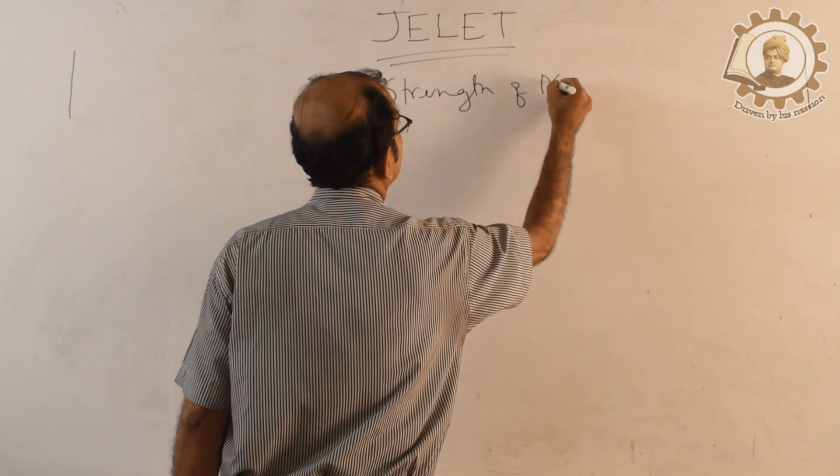That is one very interesting part of the strength of material, that is the stress strain diagram. Okay, now let us discuss. Now, before going to discuss this stress strain diagram, first of all we have to know very clearly what is stress and what is strain. So, now let us discuss the term stress. In our Bengali term, that is also called the piron, and the strain is called vikriti.

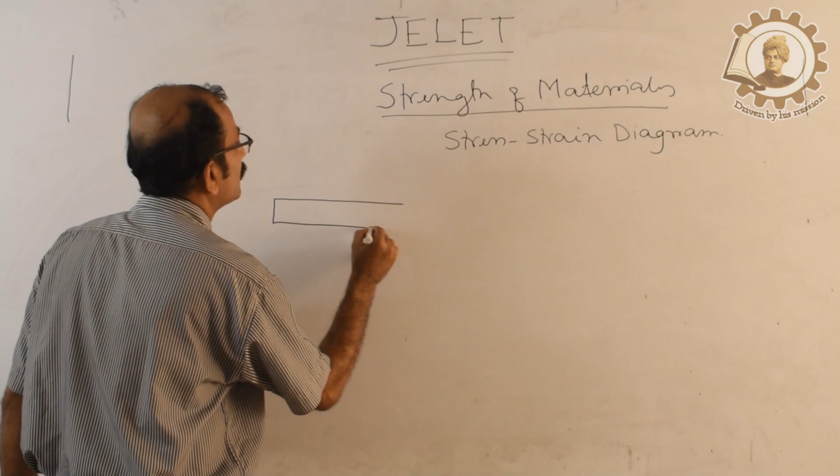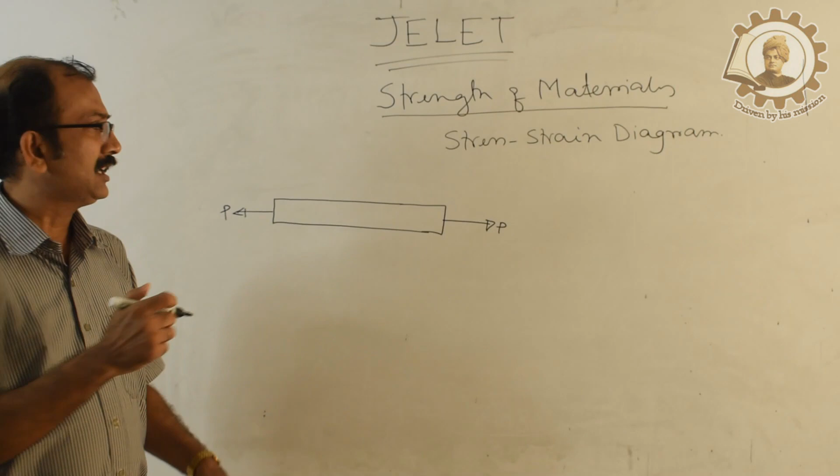Now, let us take a very small piece of iron rod or iron wire, and if we just apply a direct load, that is P, what happens? This member or this bar will try to elongate. Now, due to the elongation, one resistive force will develop inside the member that will try to resist this external force. That resistive force is called R.

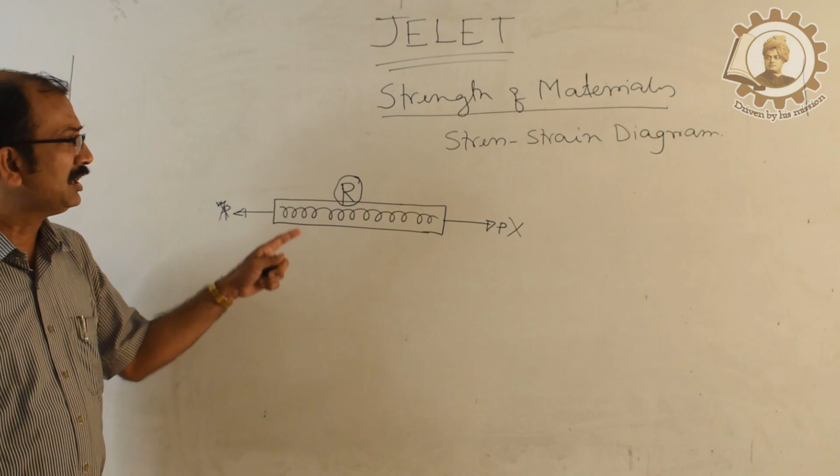Now, if we just remove this applied external load, it will spring back from this deformed state to its initial state with the help of this resistive force. Now, this resistive force per unit cross-sectional area is called the stress. So, stress is nothing but the internal phenomenon of the material.

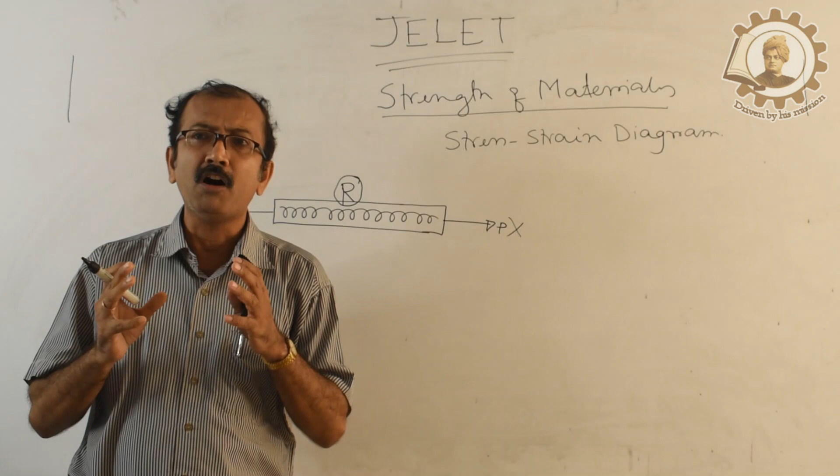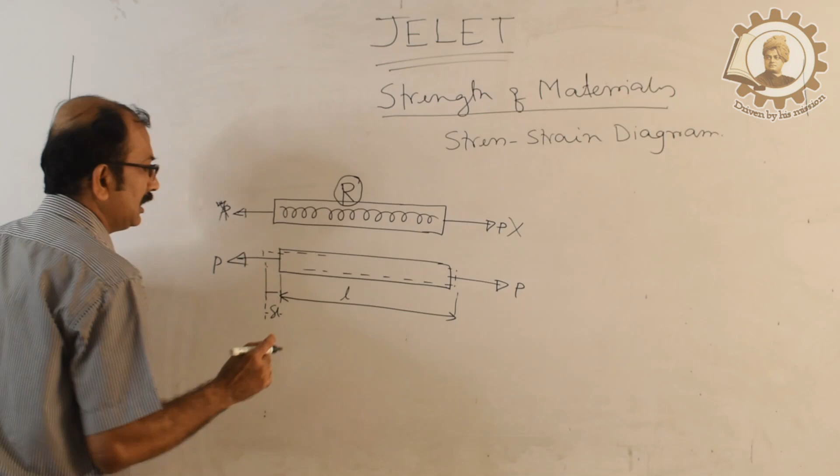Okay. Now, if we just apply the direct load, it will try to elongate the member. The diameter of the member will be reduced, and the length of the member will be elongated. Suppose the total length of the member before the applied load is L, and del L is the length increased, and the diameter before the applied load is small d, and obviously the diameter will be reduced.

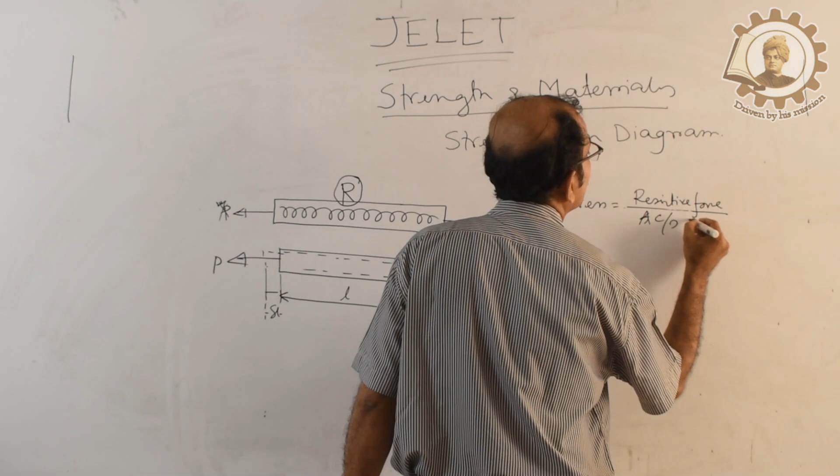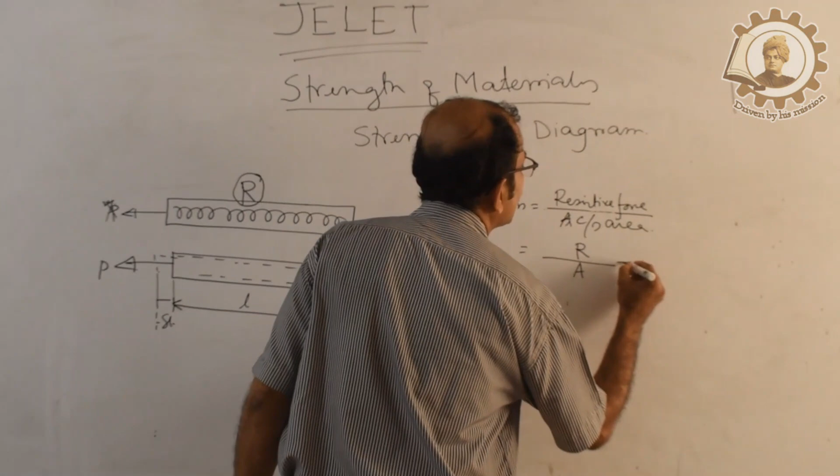Now we can write the stress is nothing but the resistive force divided by cross-sectional area. That resistive force is exactly equal to the applied load, so resistive force by A is nothing but P by A. Okay. Now that is called the stress. This stress is denoted by the symbol sigma. Sigma here is called the direct stress.

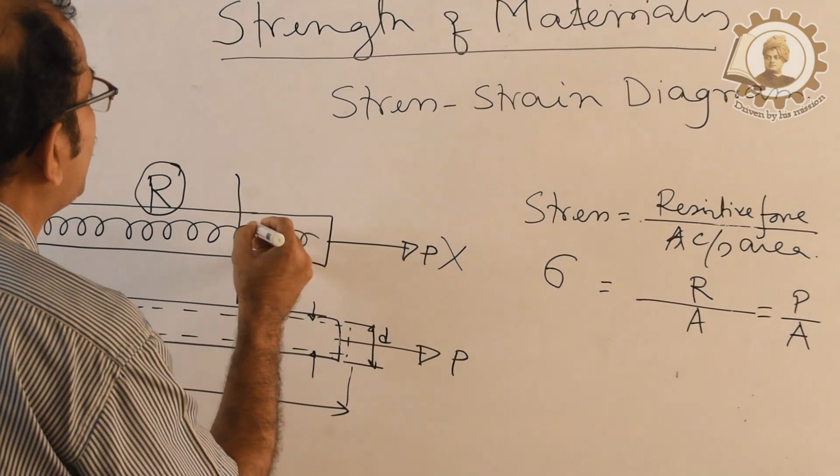So what is direct stress? It is directly applied on the member, that means the resistive force divided by cross-sectional area. Stress can be divided into many categories. The main broad classification is, one is the direct stress, another one is the shear stress.

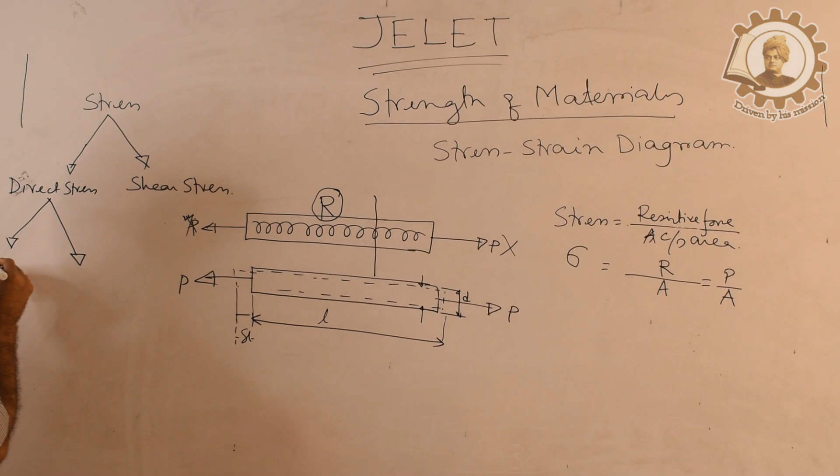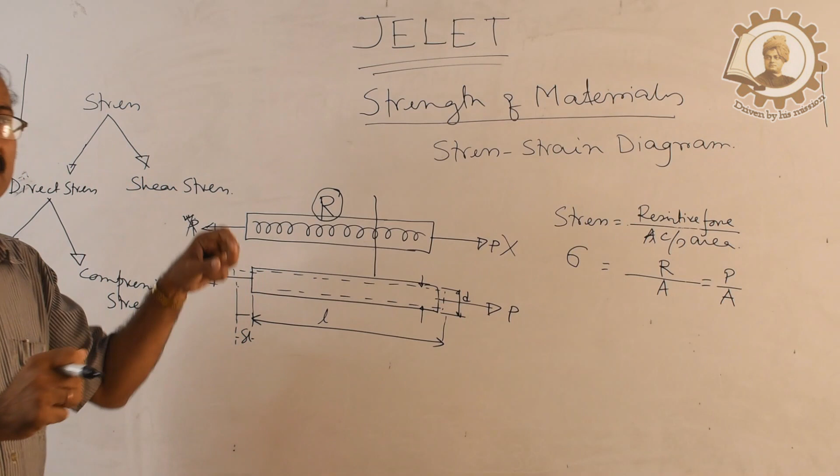Now this direct stress can also be divided into two categories. One is the tensile stress, another one is the compressive stress. So what is tensile stress? When the member tries to elongate, the stress developed inside the member is called the tensile stress. Now the same phenomenon, if we just compress the member, a resistive force will be developed inside the member that will try to resist that external load.

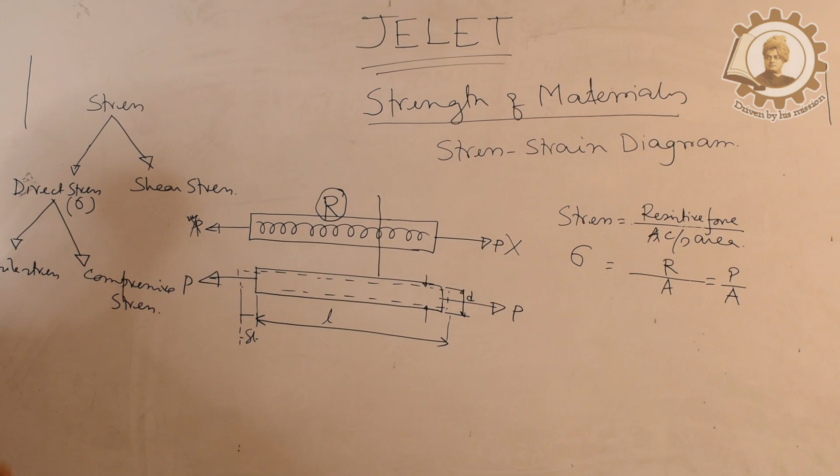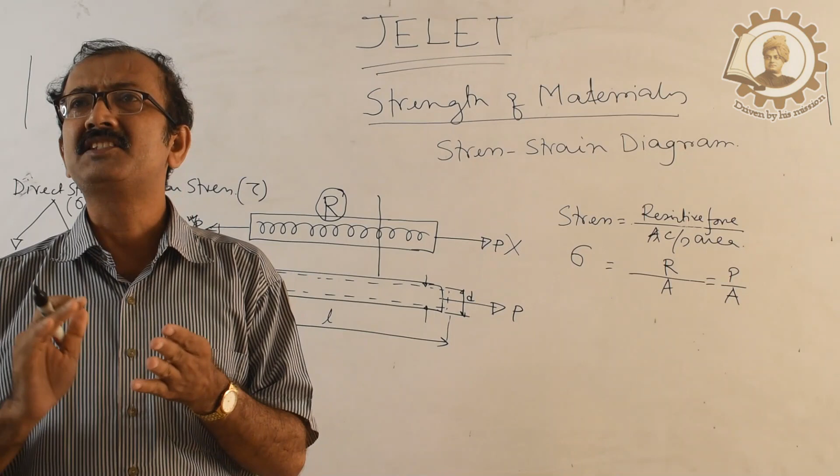So that compressive stress is nothing but that resistive force divided by cross-sectional area. These two stresses are denoted by the symbol sigma. Now shear stress, its symbol is tau. When a system tends to slide from one part to another part, the stress developed in the shearing area is called the shear stress.

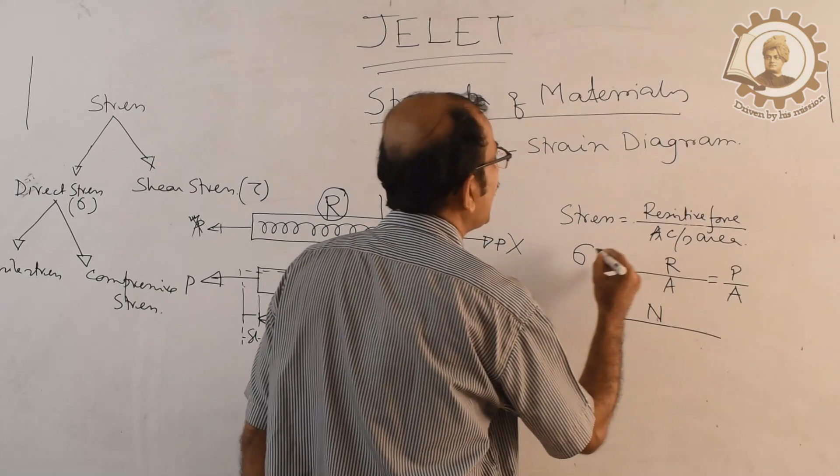Now if you just see, the resistive force, that means the load, its unit is the Newton. So Newton, and the cross-sectional area, that is the millimeter square.

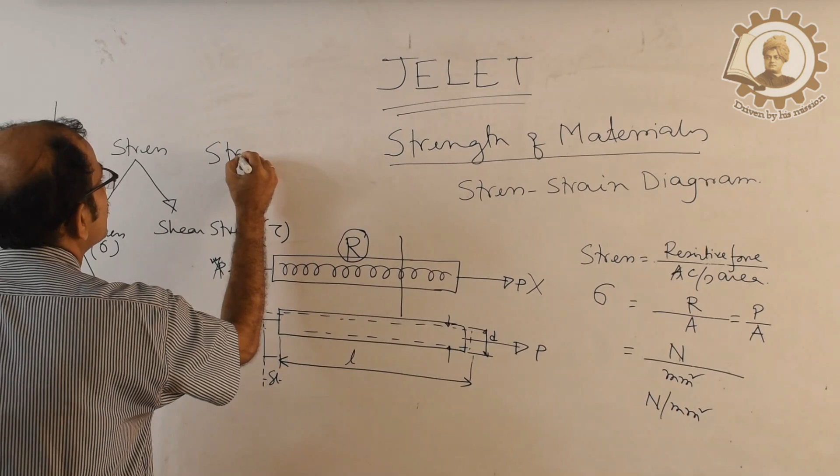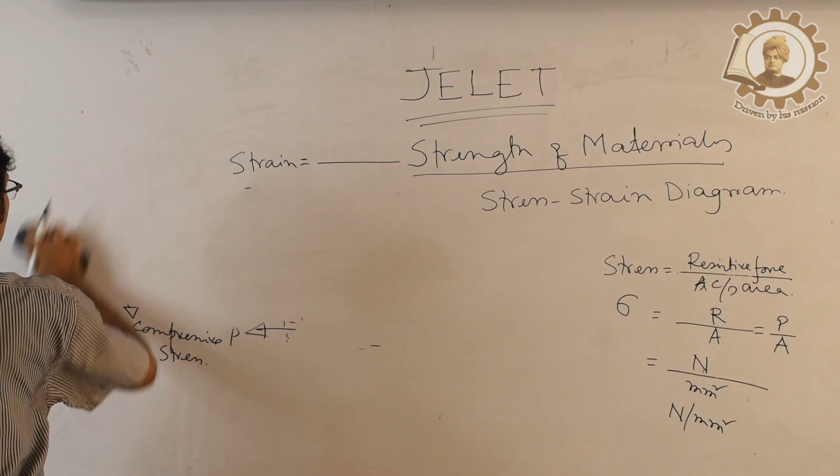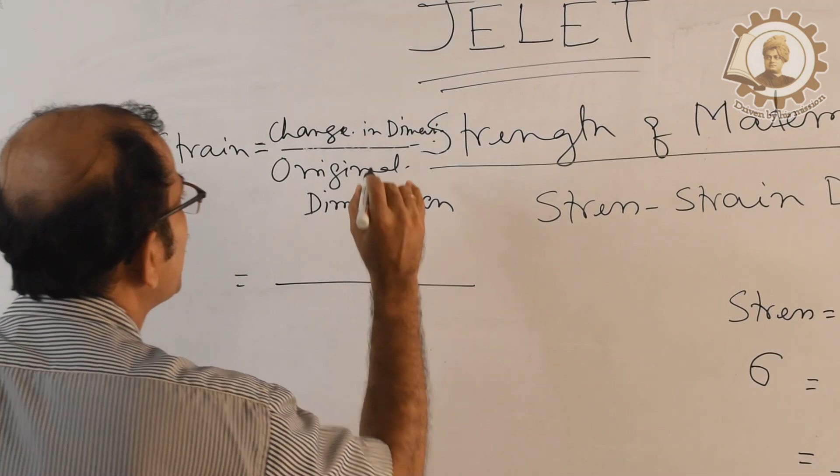So the unit of stress is Newton per millimeter square or kilonewton per millimeter square, whatever it may be. Now in the case of strain, strain is unitless. Why is strain unitless? If we just write strain, strain equals change in dimension divided by original dimension. I mentioned change in dimension because if we elongate the member, the length will be increased as well as the diameter will be reduced. If you compress the member, the diameter will be increased and length will be reduced. So change in dimension by original dimension.

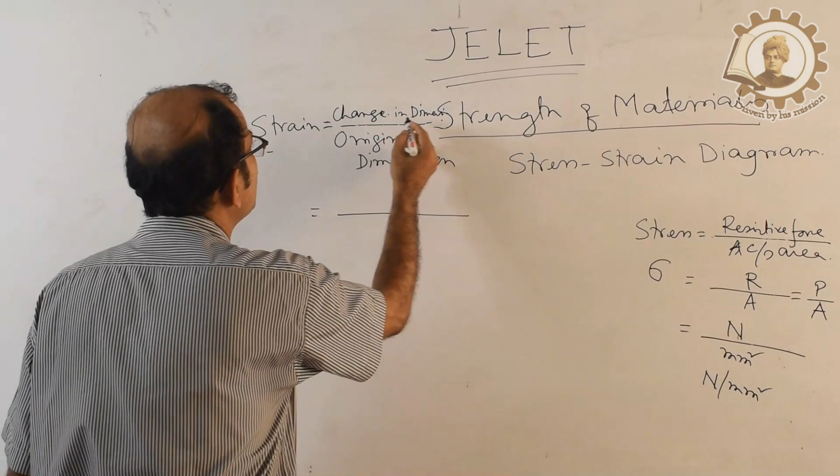If we consider the length, then it is del L by L, that is the change in length by original length. Strain is denoted by the symbol epsilon. So epsilon can also be written as del D by D, that is the change in diameter by original diameter. This is the ratio of two lengths. That's why it is unitless. So strain is unitless and stress is Newton per millimeter square.

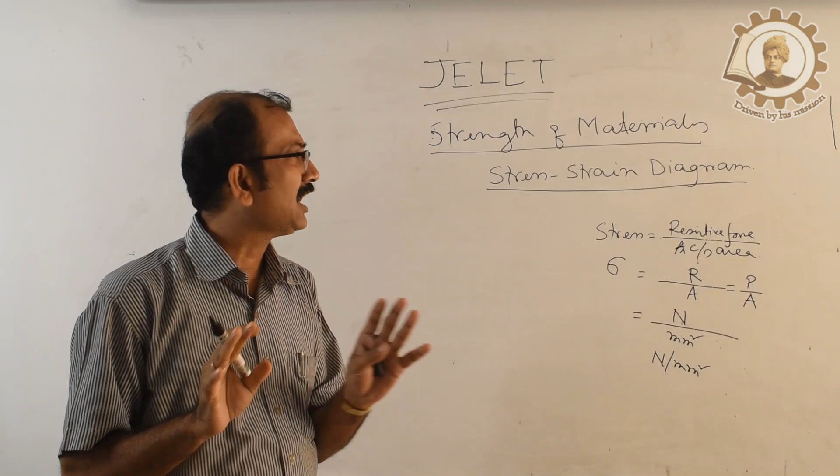Now we discuss the stress strain diagram. The stress strain diagram of mild steel, that is the ductile material. There are so many types of material: ductile material, brittle material, malleable material. The broad classification is that material can be divided into two categories. One is ductile in nature, another one is brittle in nature.

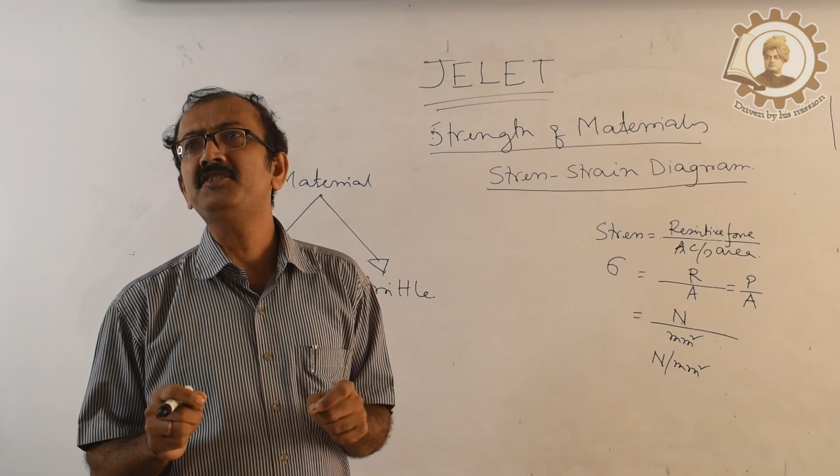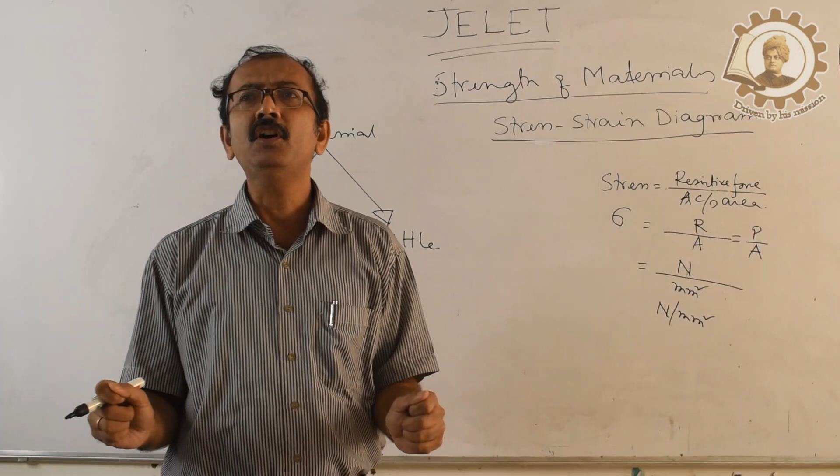So what is ductile material? It is the property of the material by virtue of which the material can be drawn into wire. Examples of ductile material are mild steel, MS, copper, and aluminium. These have the ductile property, that means the material can be drawn into wire. This type of material also has another property, that is the malleable property.

So what is malleable property? It can be flattened into sheets. Mild steel can be flattened into sheets. Copper also has the malleable property, that means it can be flattened into sheets. Aluminium also. So these are the ductile materials. A very common example is MS, mild steel. The steel that is generally used in our construction is called mild steel.

Now the question comes, why is it called mild? Mild means a little bit. A small amount of some element is present, that's why it is called mild. Which element is present in small amount? That is carbon. The percentage of carbon in the steel is less, within a range, so the steel is soft in nature and can be drawn into wires.

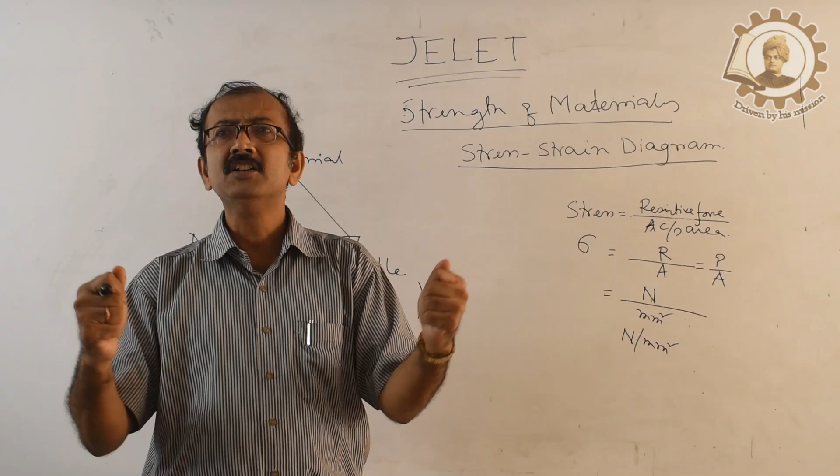Brick, stone, chalk, glass are brittle materials because they are very weak in tension. If you apply a load to brick, chalk, glass, or stone in the tensile direction, it will not take much tensile load; with a small amount it will break easily. But if you apply compressive force to brick or chalk, it will take a large amount of compressive load, but the elongation of the brittle material is very less.

So that is ductile material and brittle material. Now we go to the stress strain diagram of the ductile material mild steel first, and after that the brittle material. Now let us discuss.

So this axis represents the stress and this axis represents the strain. Symbol sigma, that is the direct stress, and this is the epsilon, strain. Now if you see this diagram, this is the stress-strain diagram, so just at the bottom we write stress-strain diagram of mild steel, MS. So this is a ductile material. Okay.

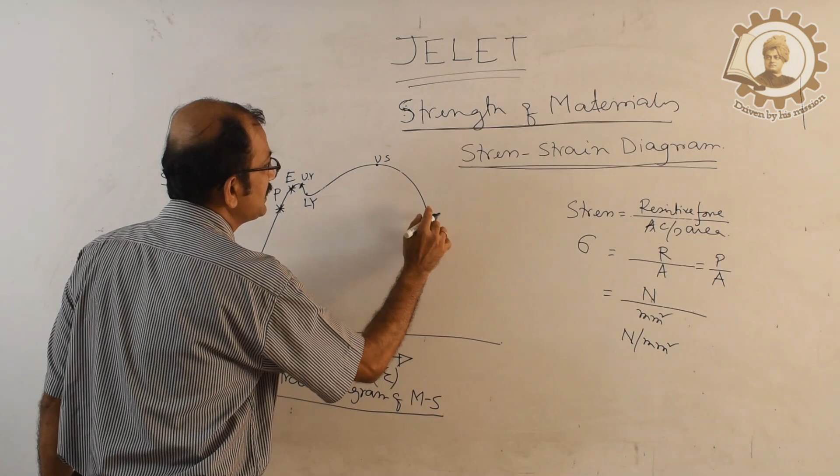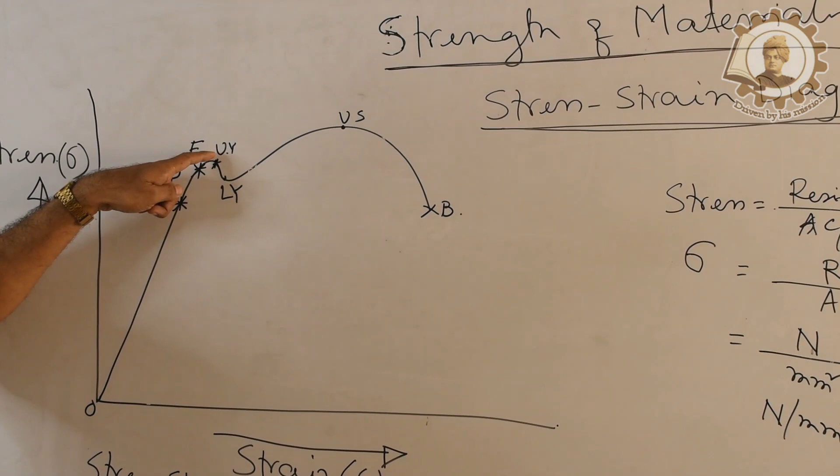Now you see that this line is passing through the origin, and there are a few points. One is the proportional limit P, this is the elastic point, this is the upper yield point, this is the lower yield point, this is the ultimate stress, and this point is the breaking stress or breaking point. Now I am repeating it again. Proportional limit, elastic limit E, upper yield point Uy, lower yield point Ly, ultimate stress, and this is the breaking stress or breaking point.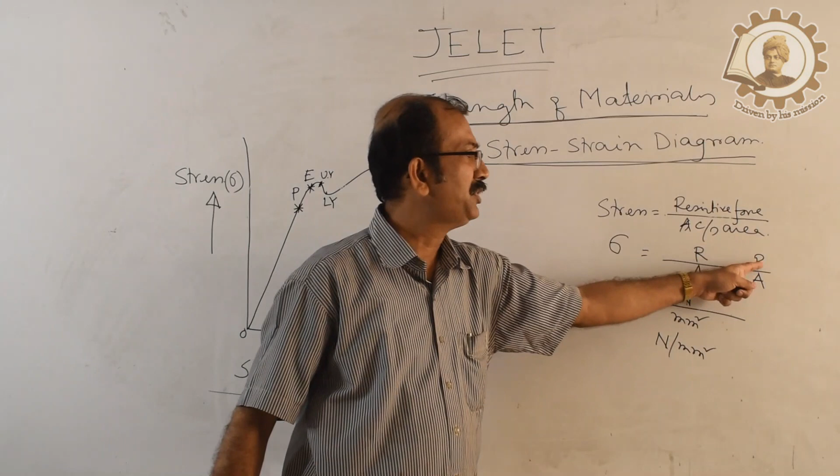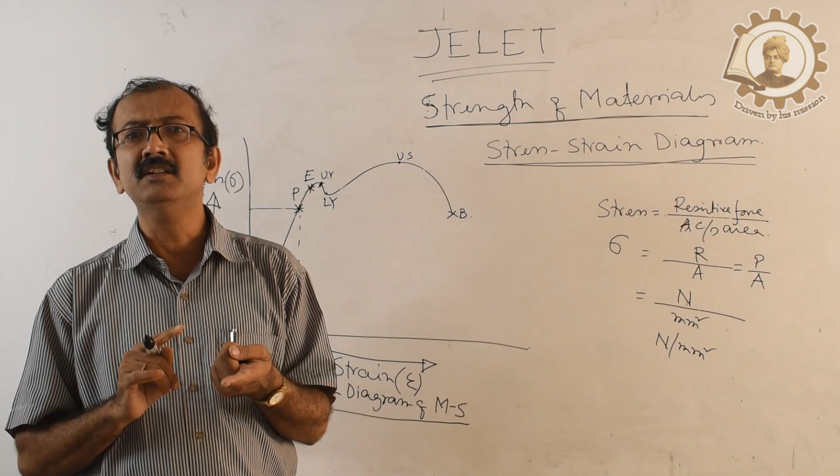Now this axis represents stress, so it is nothing but the resistive force by area, you can write P by A. Now this point is the proportional limit. So what is the meaning of proportional limit? It is a proportion of stress and strain. Stress is directly proportional to strain. So we can write stress directly proportional to strain up to this point. Up to this point, stress is directly proportional to strain.

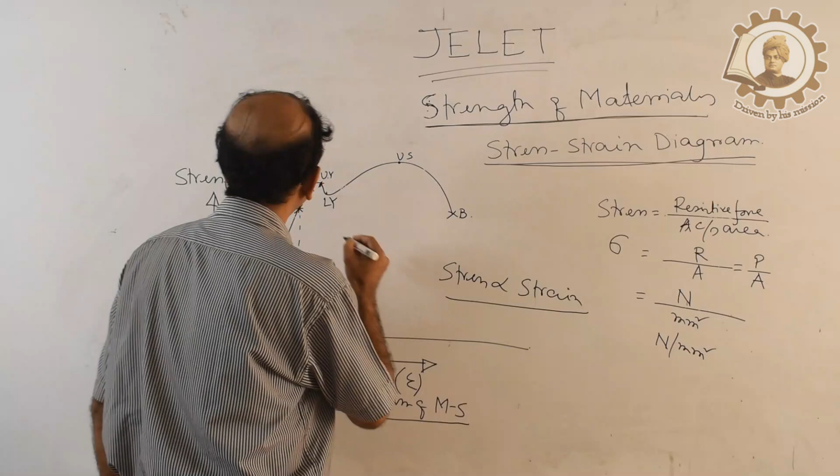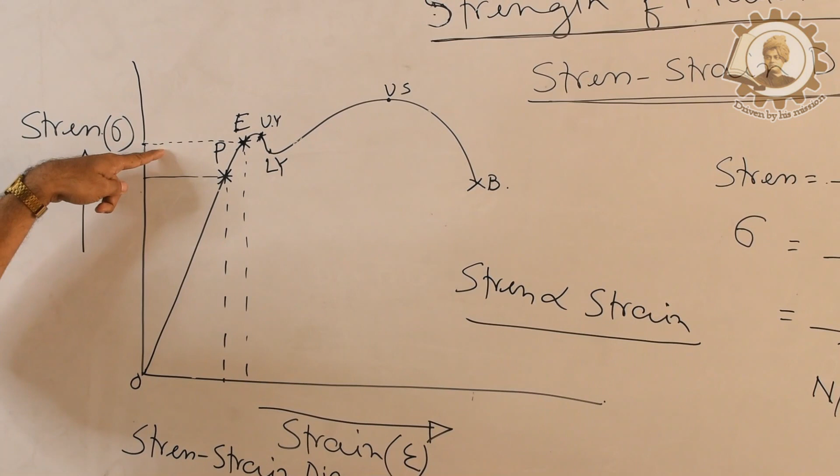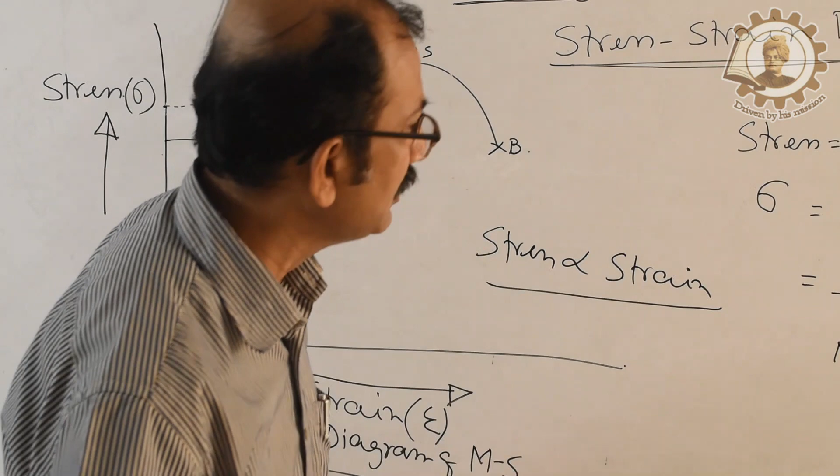Now, just after that point, it is the elastic point E. If you draw a line, this is the maximum stress that the material can withstand before permanent set of deformation. So this point again I am explaining, that is a very interesting thing. Suppose this is a piece of metal, suppose mild steel, a piece of wire or a rod.

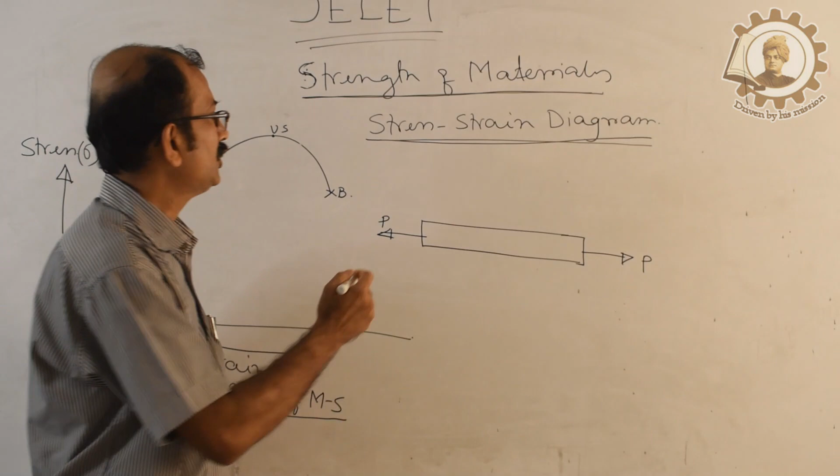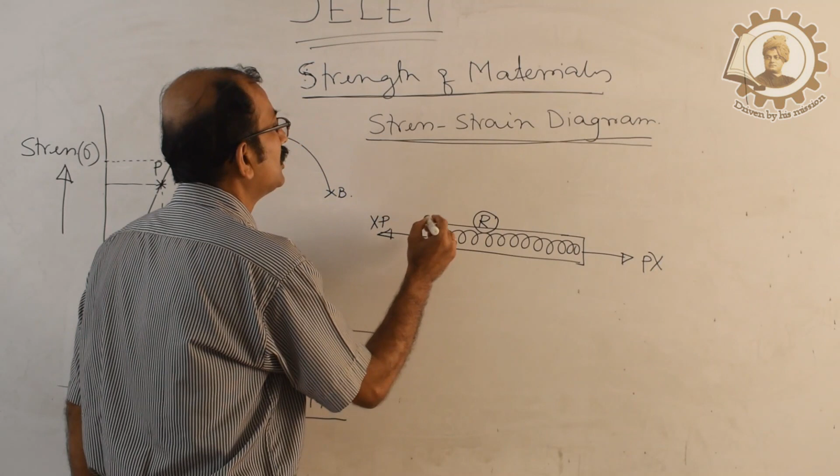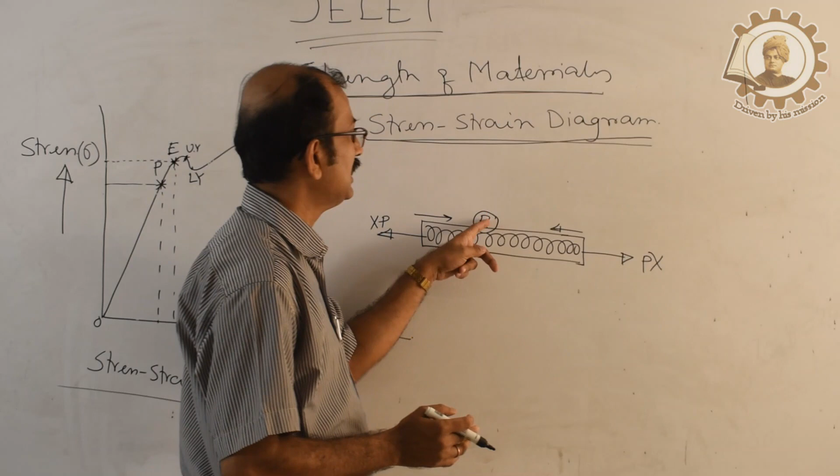We are applying a load from outside, that is the direct load, P. What happens? Due to that direct load, the material will try to elongate. So a resistive force will be developed inside the material. That resistive force will resist or try to resist that external load. If you just withdraw that external load, the material will spring back from deformed state to initial state. That means this resistive force and this applied load are exactly equal up to a certain limit, up to a certain point. Suppose we increase that applied load P, what happens?

That resistive force will also increase, but not so much. So after a certain point, that resistive force will be less than the applied load. After removing that external load, that resistive force will not spring back the material from deformed state to initial state. That means there is a point, varying from material to material. That point is called the elastic point or elastic limit of the material. Up to that point, no permanent set of deformation takes place. If we just withdraw the external load, the material will spring back from deformed state to initial state. So that point is called the elastic point of the material.

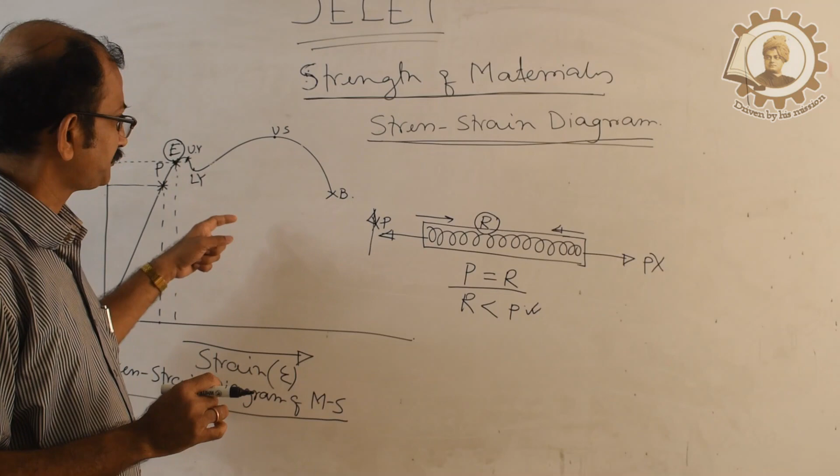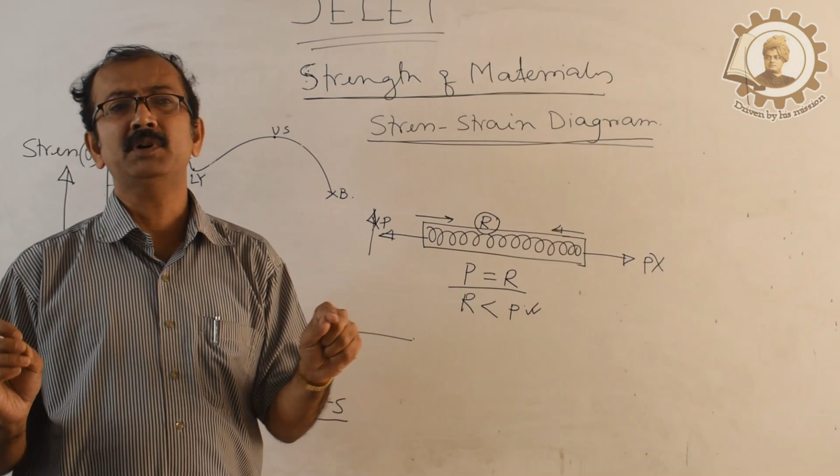In the case of mild steel, that elastic limit or elastic point is much higher compared to other materials. Okay, so that's why in your 10th standard you have heard the line that iron is more elastic than rubber. The elastic point of iron is higher than the elastic point of rubber. Now, what is elastic point or elastic limit? It is the maximum stress that the material can withstand before permanent set of deformation. That means there is no permanent set of deformation. That means this line is passing through the origin, passing through O. So this is the straight line.

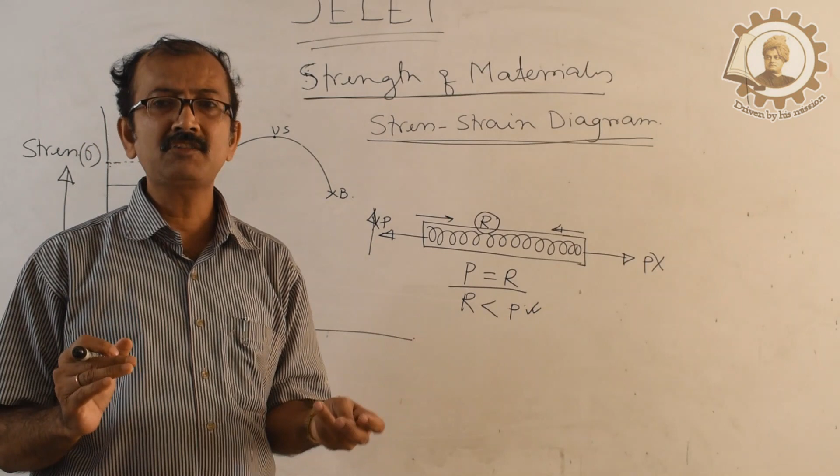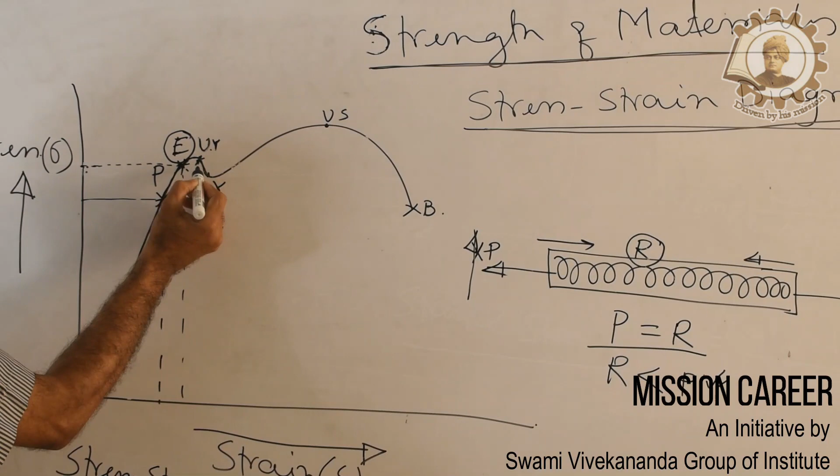Now, that is the upper yield point. So what is upper yield point? Before going to discuss the upper yielding, what is yielding? Yielding means without further increasing stress, the strain increases in the material. Okay, so if you see, there is a starting of the formation of neck. This is the formation of neck. The stress is not increasing, but the strain increases.

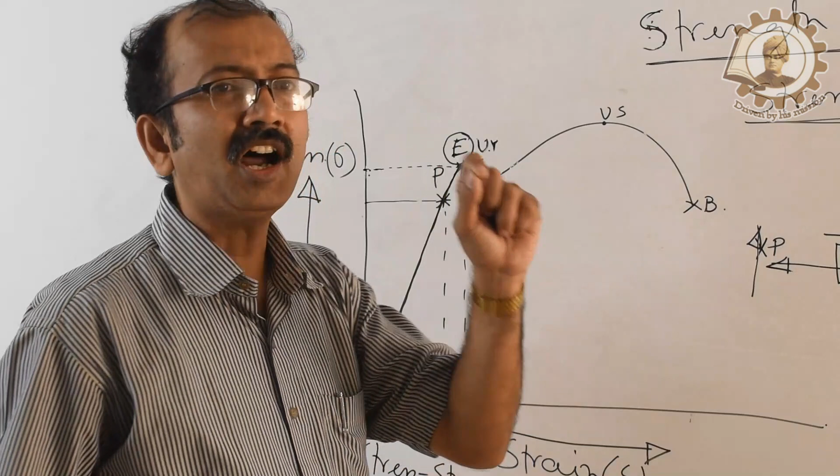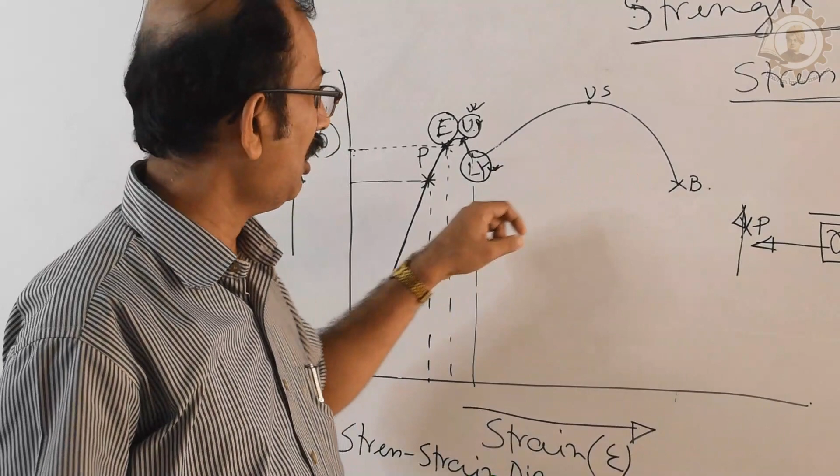The strain increases. Now, the point where the yielding starts, yielding means the permanent deformation, that is called the upper yielding. Where the yielding ends, that is called the lower yielding or lower yield point. So these 2 points are very, very important. One is the upper yield point and the other is the lower yield point of this MS, mild steel. Now, the yielding ends.

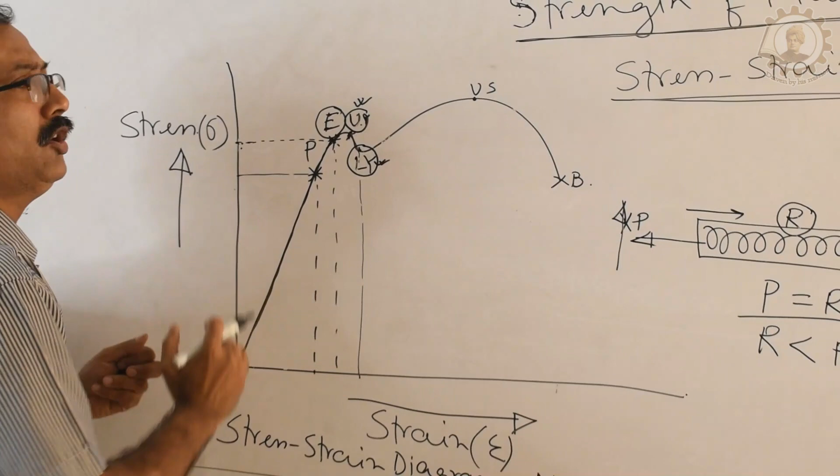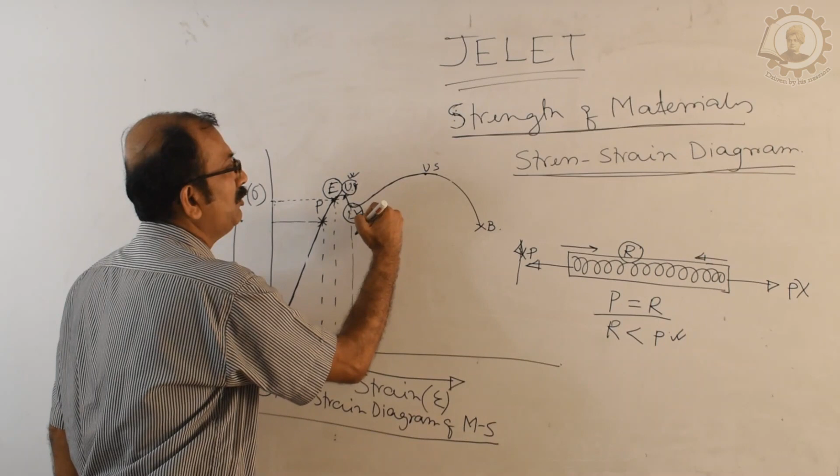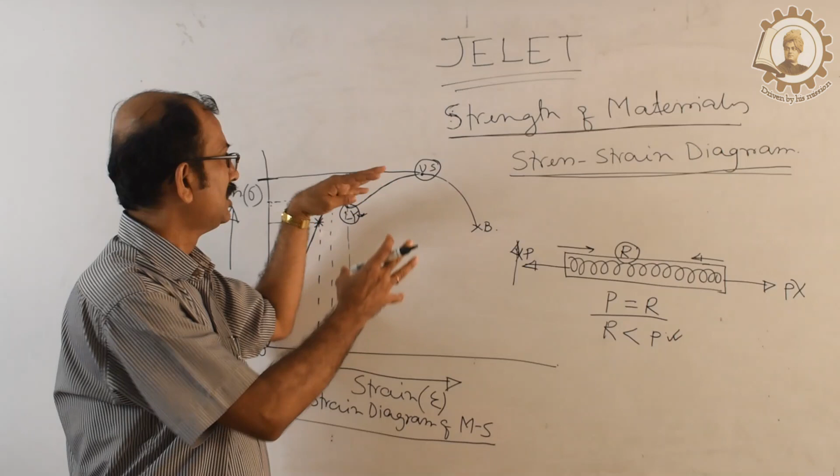Now if we further apply load, further increasing stress, what happens? This is the permanent set of deformation, so the material will elongate. So that is the ultimate stress. If you draw a line, this is the maximum stress that the material can withstand before fracture, before failure. It is the maximum stress in this diagram, that's why it is called the ultimate stress. And just after that, the material will not sustain that load, so it will elongate and it will fail. So this is the breaking point.

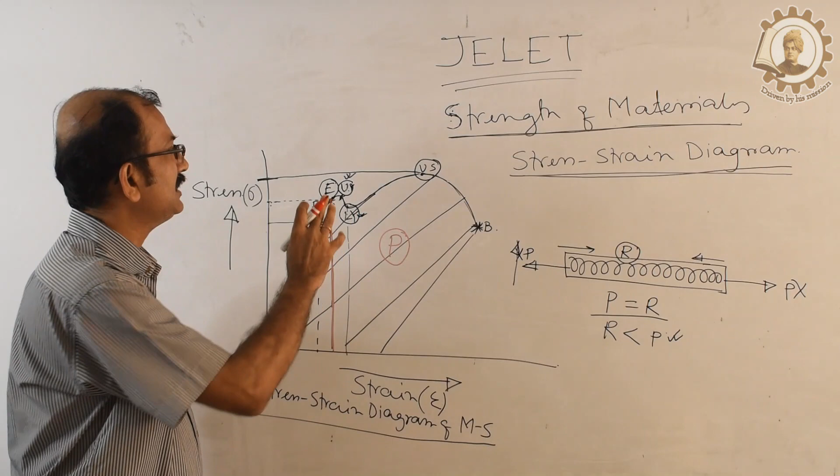Now the question comes, what is elastic zone and what is plastic zone? Elastic zone means if you apply load just before point E and then withdraw the load, the material will again regain its original shape. No permanent set of deformation takes place. But if you move after point E, there is a permanent set of deformation.

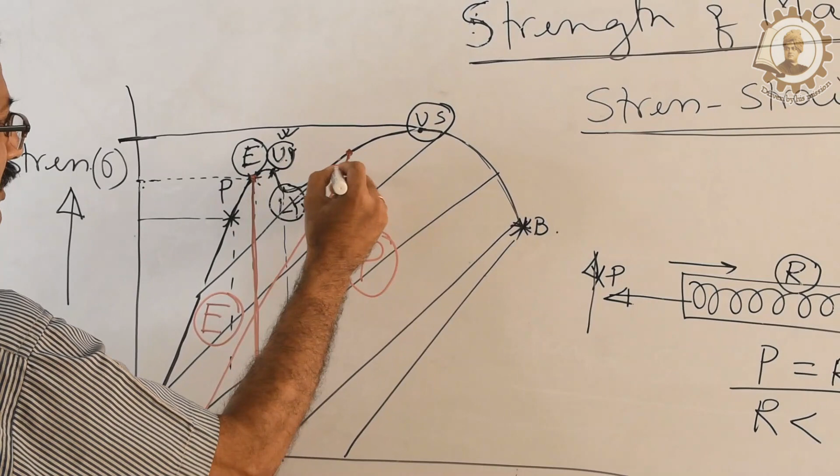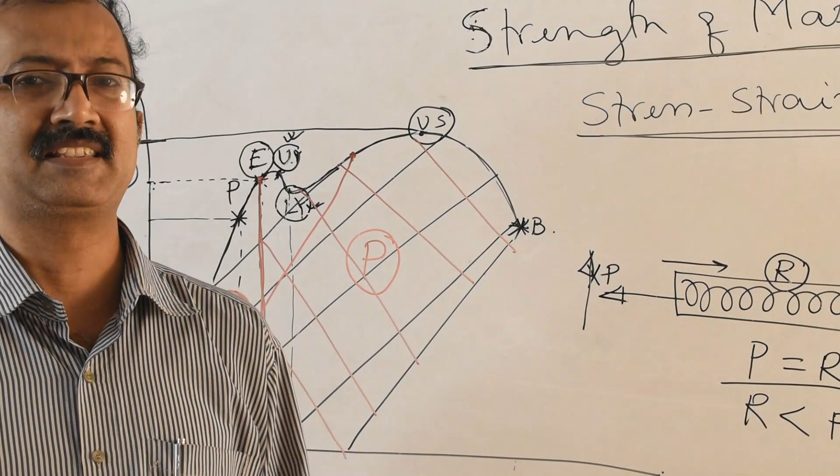Suppose you withdraw the load at this point, what happens? It will not spring back through this path. It will go just like this. So this part just after point E is the plastic zone. Plastic zone means a permanent set of deformation takes place. In the elastic zone it is not permanent; the material can spring back from this state to its original state.

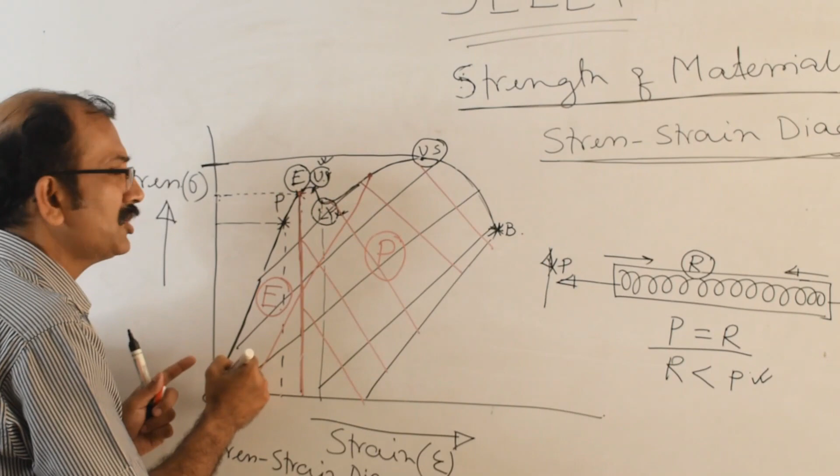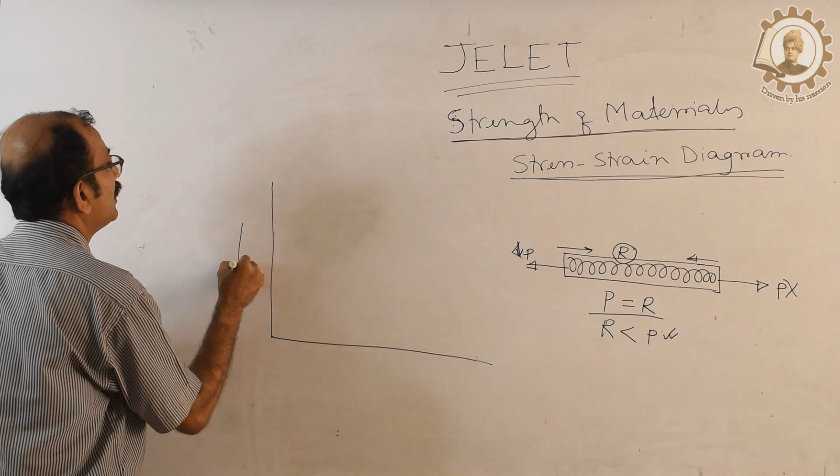So this is the stress strain diagram of mild steel, and mild steel is a ductile material. Now we discuss the brittle material. What happens in the case of brittle material? Let us discuss. The ordinate and abscissa are stress and strain, with the standard symbols sigma and epsilon.

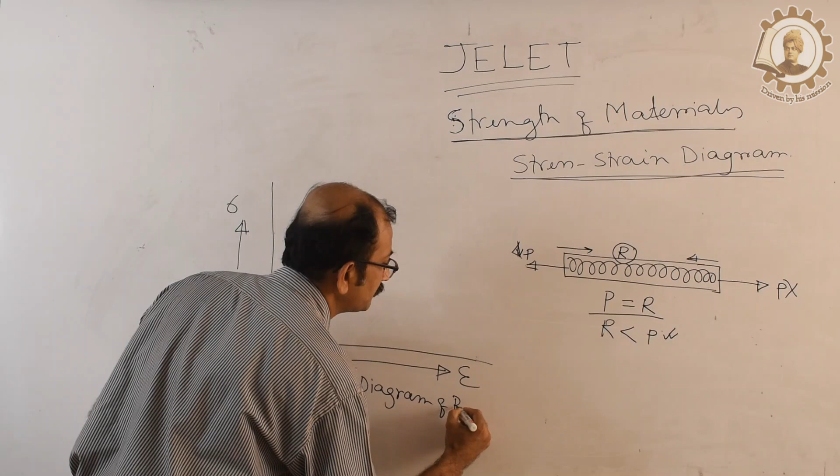Stress strain diagram of brittle material. As we have discussed, brittle material has a very small amount of elongation. Brick, chalk, stone: these are the very common examples of brittle material.

Now we draw the stress strain diagram. The stress strain diagram of brittle material is just like this. There is only one point, called the breaking point or breaking stress. That means there is no specific yield point for brittle material. Another very important significance of the yield point is that before fracture, before failure, the material will show an indication.

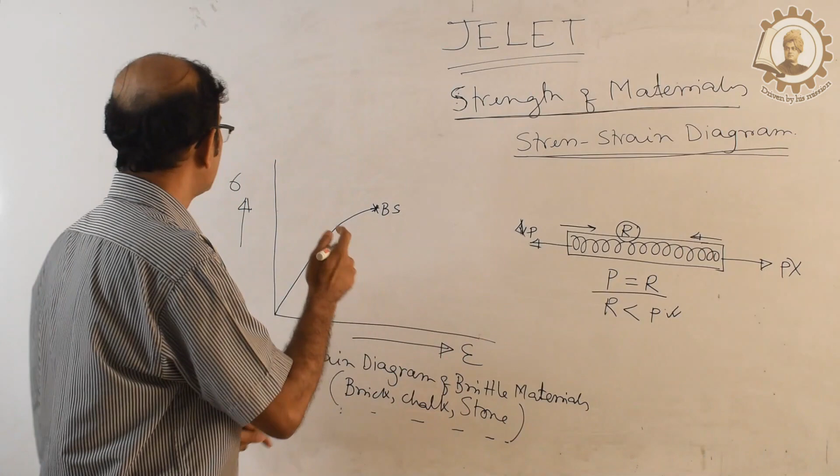Suppose we apply a tensile load on a brick; the brick will not elongate. But after a certain load, it will break, it will fail. You only know at which load the brick, stone or chalk will break, but before failure it will not elongate. In the case of ductile material, the material will elongate before failure. That is a very important property of ductile material: before failure, it shows an indication.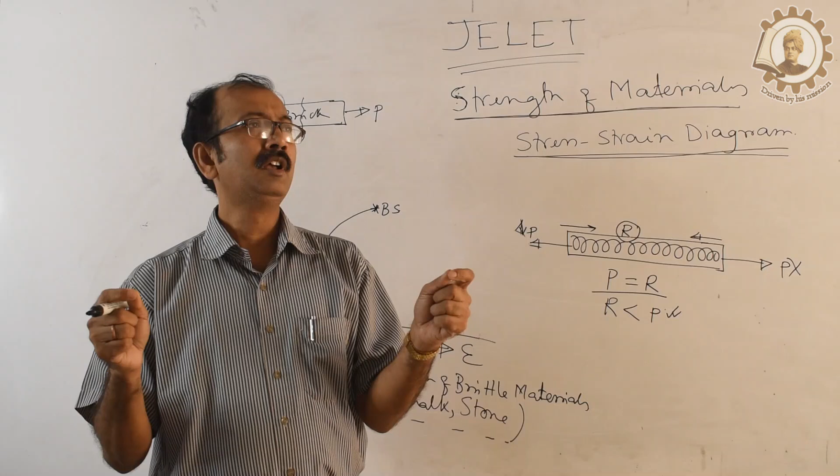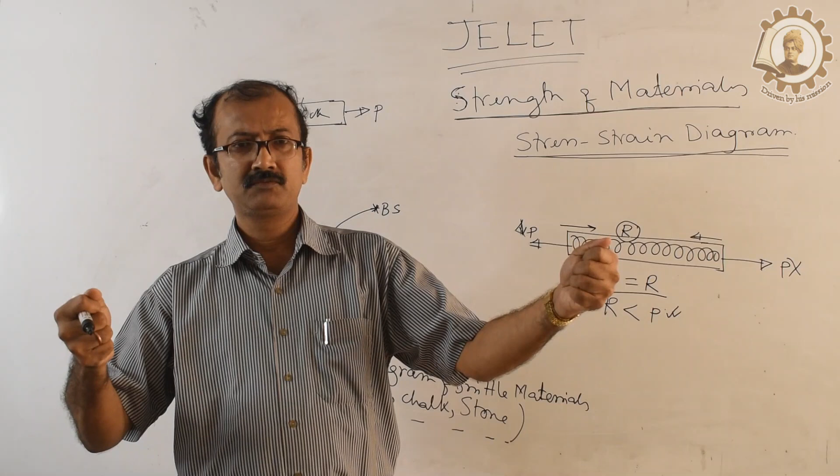A very simple example: take a piece of MS wire and apply a tensile force. First it will take load, after that it will elongate and form a neck. Let's draw a very simple diagram. This is the piece of wire under tensile load, and after a particular load it will elongate, and in this portion a neck forms and it reduces in diameter.

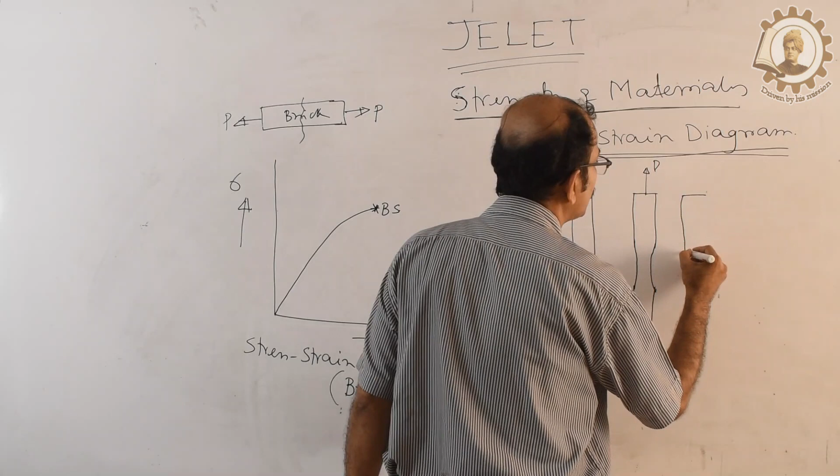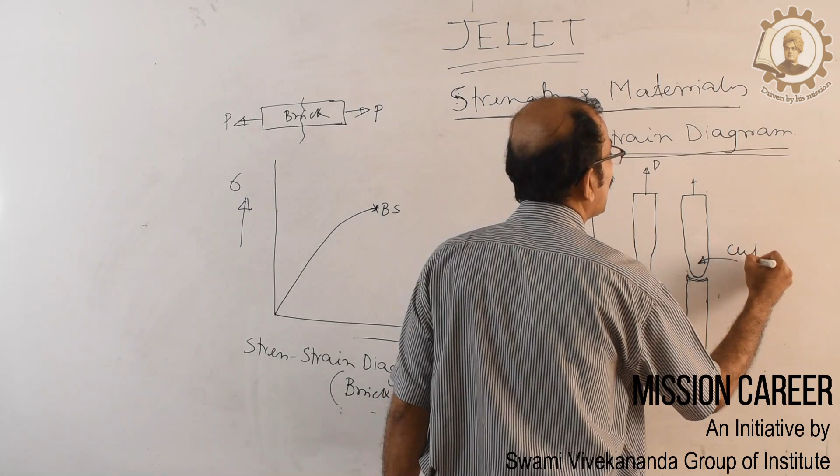And when it breaks or fails, it will form a cup and cone. This is called the cup and this is called the cone, so the failure is called cup and cone failure. In the case of brittle material there is no specific yield point, so it will not show any indication. The only point is the breaking point, the breaking stress. So this is the stress strain diagram of brittle material like brick, chalk, stone.

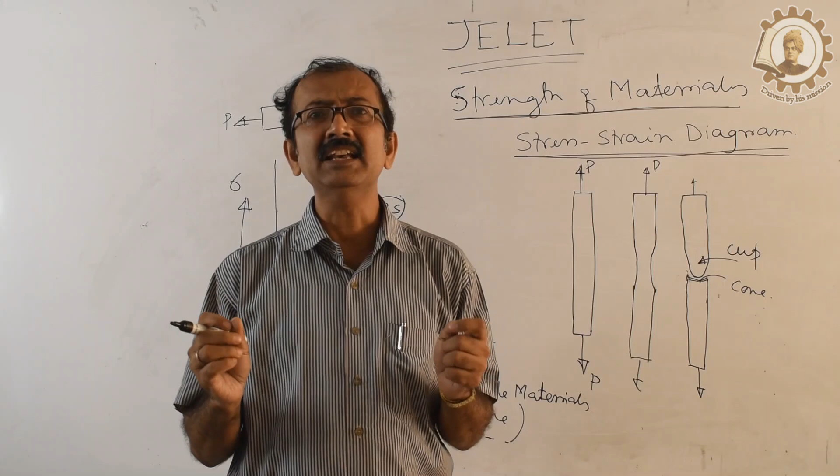Another interesting thing is that there are a few ductile materials like aluminium, brass, copper, especially aluminium, whose stress strain diagram is just like that of brittle material. Aluminium is not a brittle material, it is a ductile material, but when we draw its stress strain diagram, it is similar to the brittle material.

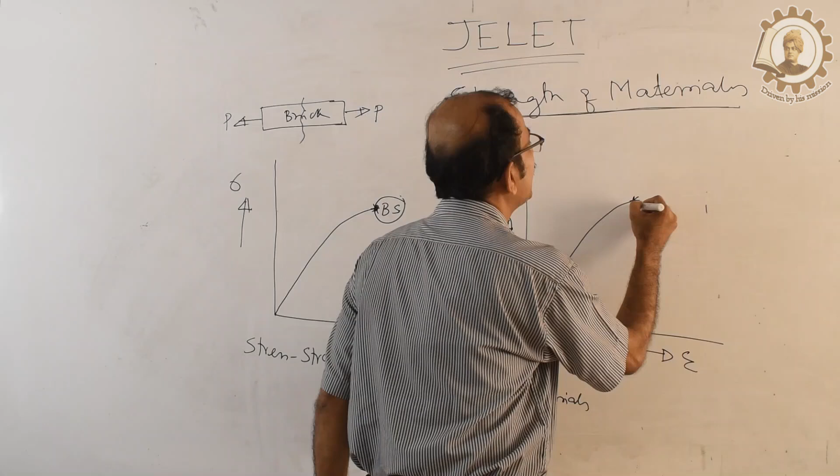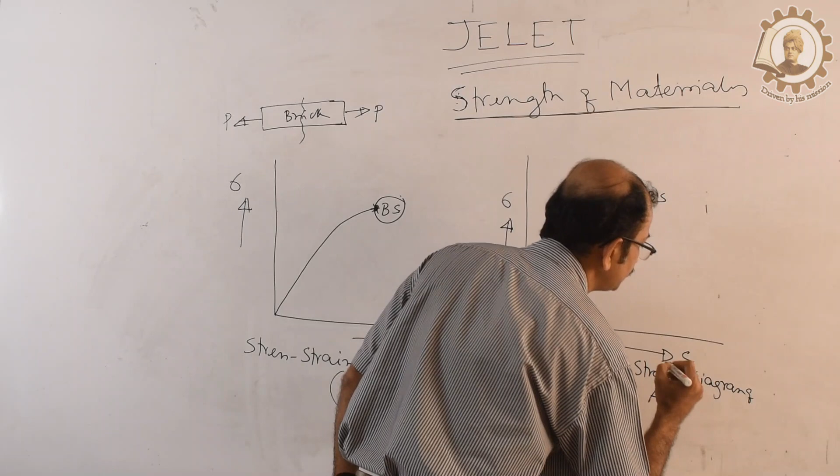Now in that case, how will you calculate its yield point? This is the stress strain diagram of aluminium. We take 0.2 percentage of strain and take a point. Listen to this carefully, it is a very interesting point.

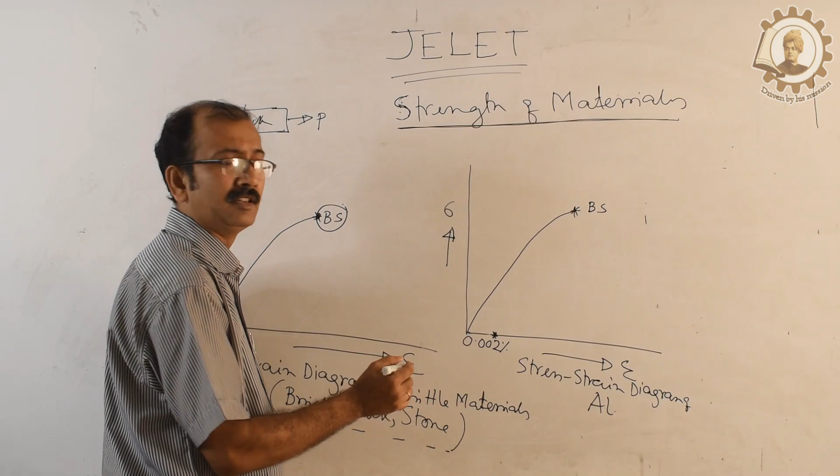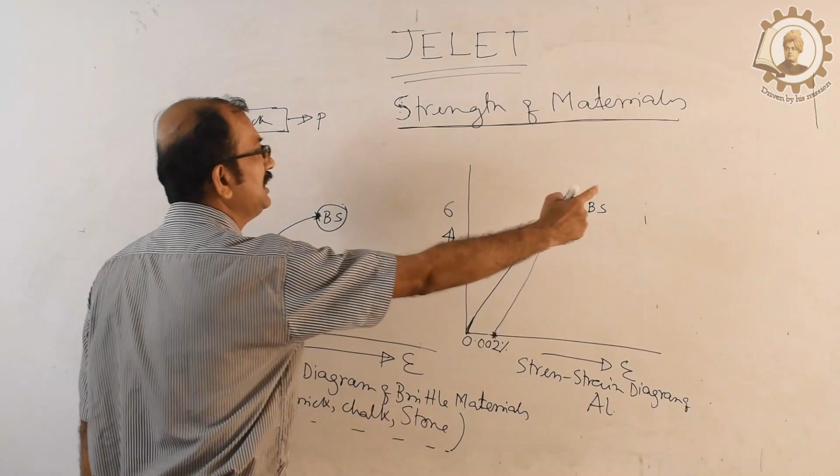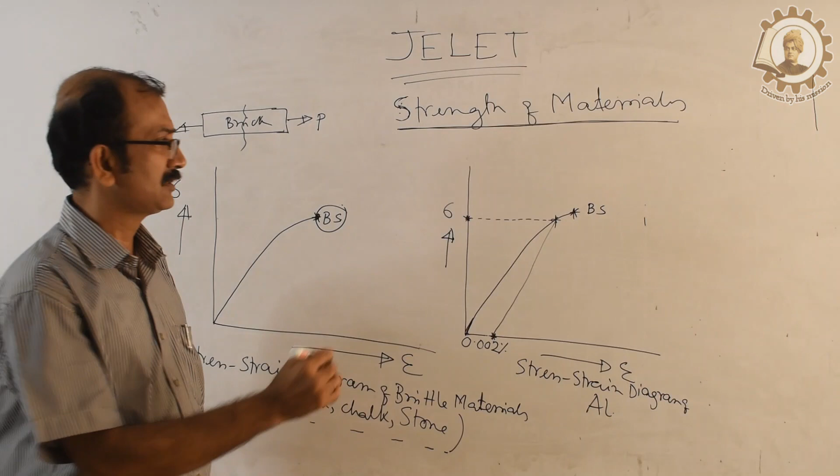Take 0.002% of strain, and from this point draw a line parallel to this, which will cut the stress strain diagram, and take that point. That stress is called the proof stress, or yield point stress. In this way you can calculate the yield point of aluminium.

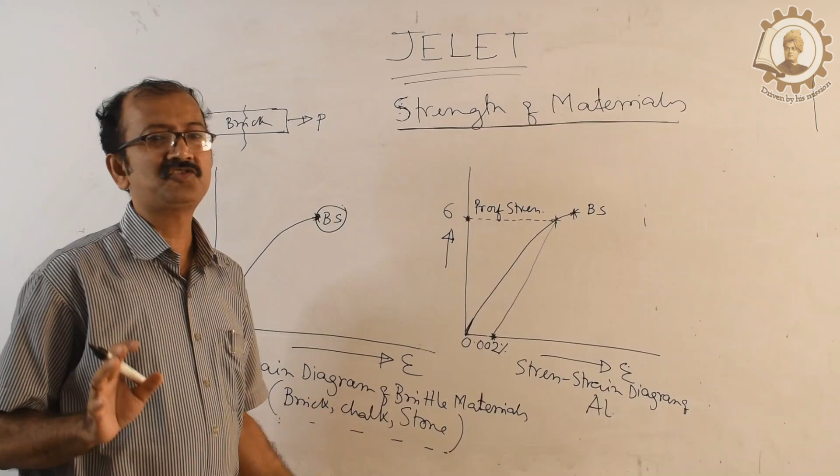So this is the overall stress strain diagram of ductile material, brittle material, as well as aluminium. Thank you very much.